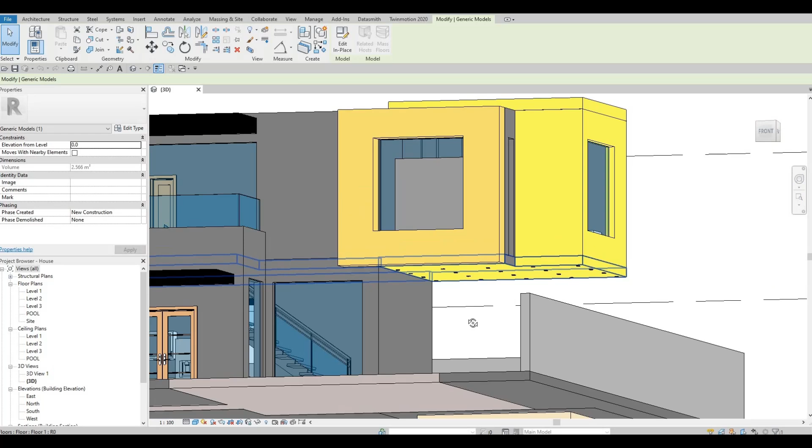So in the last video, we were able to fix everything that we have right here. As you can see, we also added some lights. So now we're going to continue working on this.

What I'm going to do first is fix this. I'm going to extend this, and at the same time, let's go to south elevation. So this is, we extended everything right here, and then we added some lights at the top.

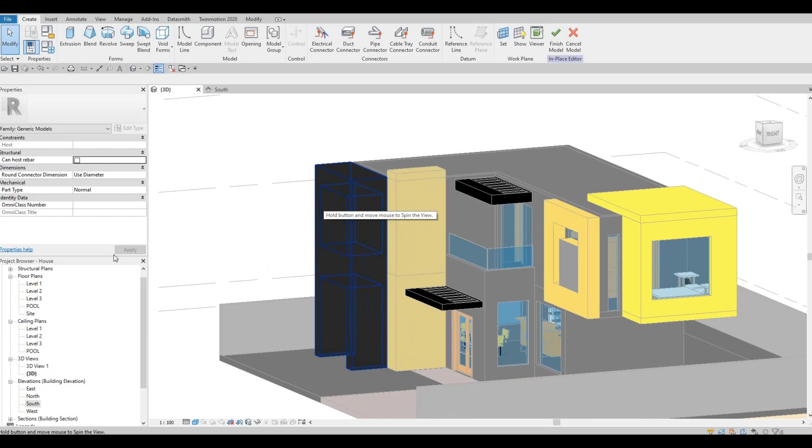Now what I'm going to do is extend a little bit because I want to void some of this, and it will look different afterwards. So what I'm going to do is edit in place, go to maybe east elevation. So now we could see that this is extruded a bit, and now we could do some void extrusion.

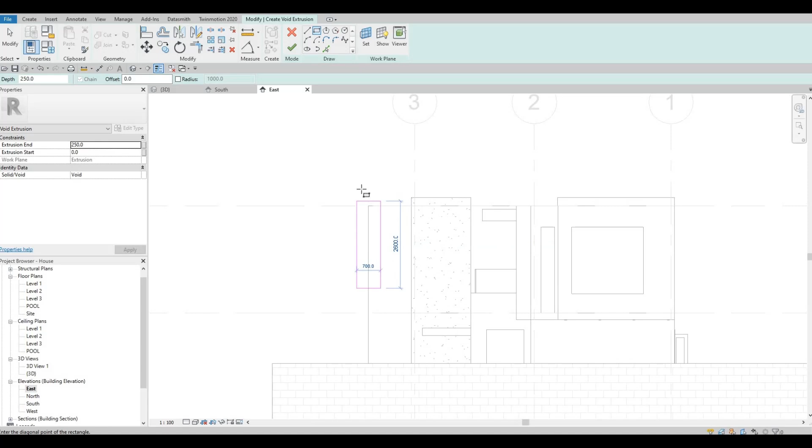Click that, void extrusion, and then we could just pick the plane, and we're going to choose this plane, and then after that we're going to void some of this, and then here I'm going to slant it a bit.

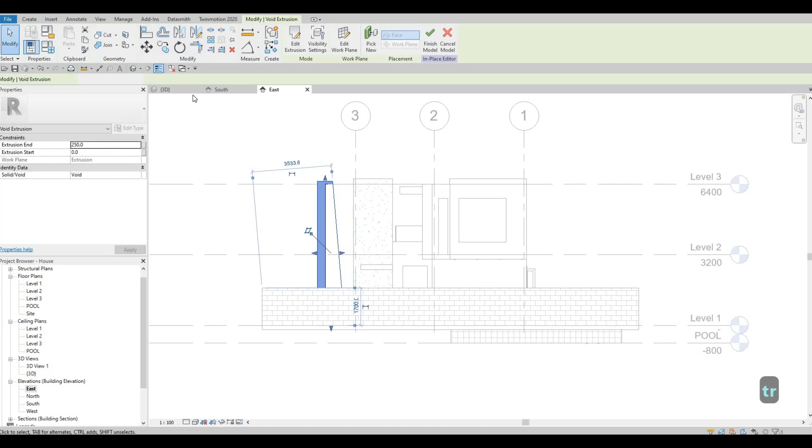And then here I just need to trim and extend and click finish. And before we do anything else, we're going to extend this, going out and going in like that. And then what we need to do next is just cut geometry, and it will cut those ones out.

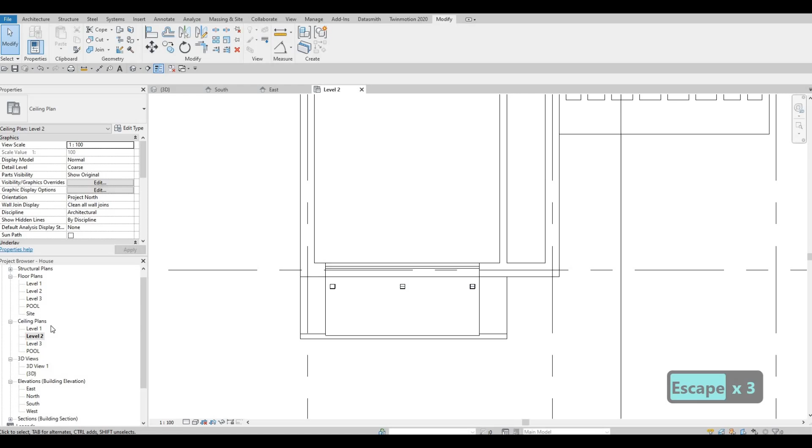All of this, we just need to go to our level 2 again, finish this, and then we just need to align it so that we could align all of this back. And then let's go to our level 1 and then just align this one right here.

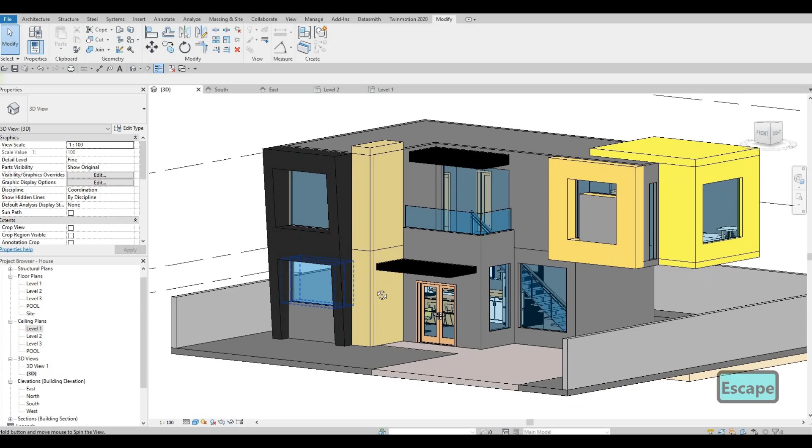We could just move it manually, and let's see if it's there properly, because we did cut a big chunk of this, and as you can see, it looks nicer now. Something different that we could do.

I know it's not visible that it's slanted, so we might end up editing more or adding more of that void extrusion.

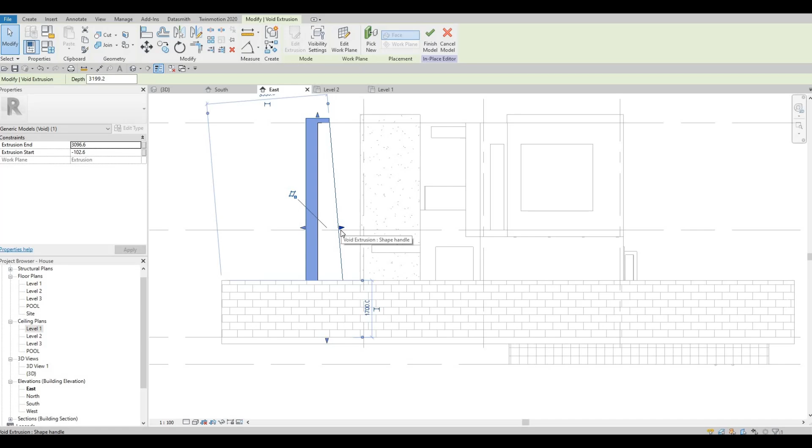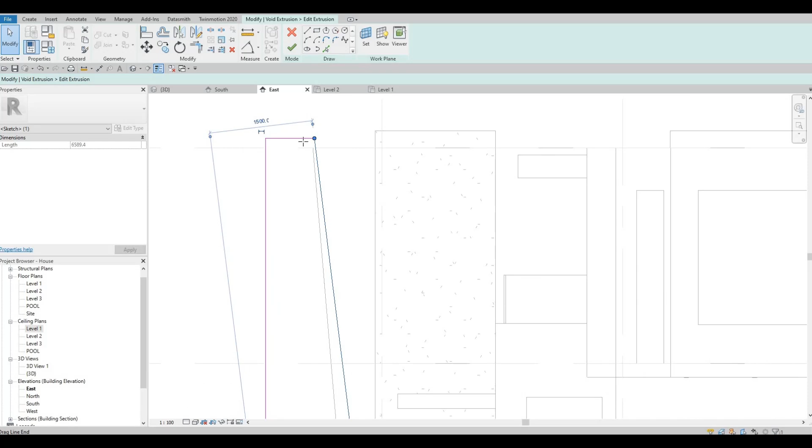I'm going to edit extrusion. Maybe we could increase it more so that it's much more visible. And then trim those, and then click finish, and as you can see, it's much more aggressive.

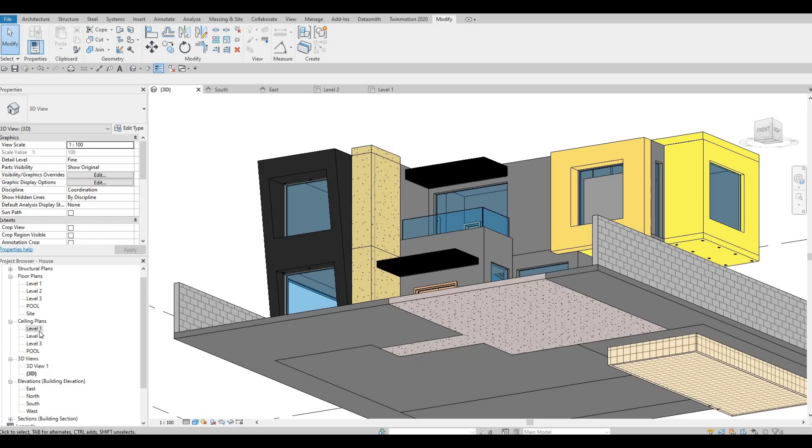What I want to do on the top portion, so let's go to ceiling level 2, is just move this one down a bit so that it's visible like that, and it's equally from the distance right here, so roughly in the middle.

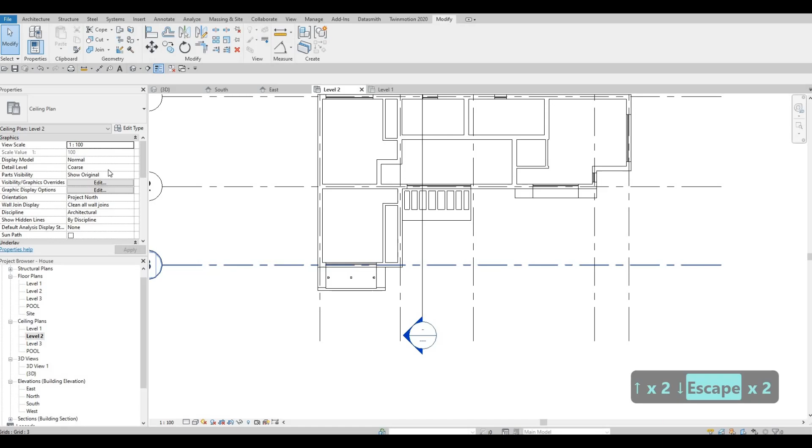So we're just gauging it. Let's go back to 3D and see where we're at. I'm going to make this one small a bit, similar to this thickness. I think that's good enough.

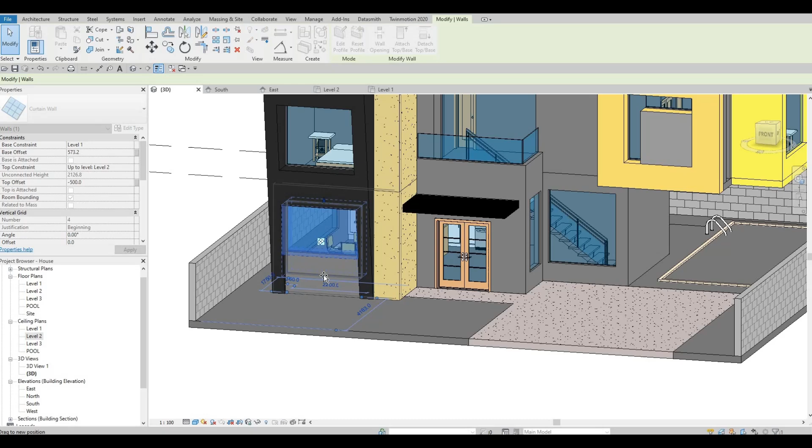What I'm going to do is add some, I'm probably going to increase this. The reason for that is I don't want to add any more of that plant box, so I'm going to align it from this so that everything is aligned.

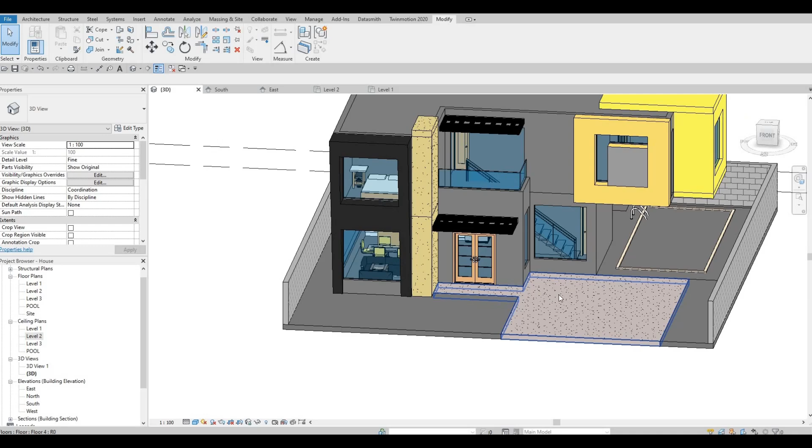Although here I'm going to add some plant box because we have some concrete pad here, and we wanted to add more. So that's what we're going to do now.

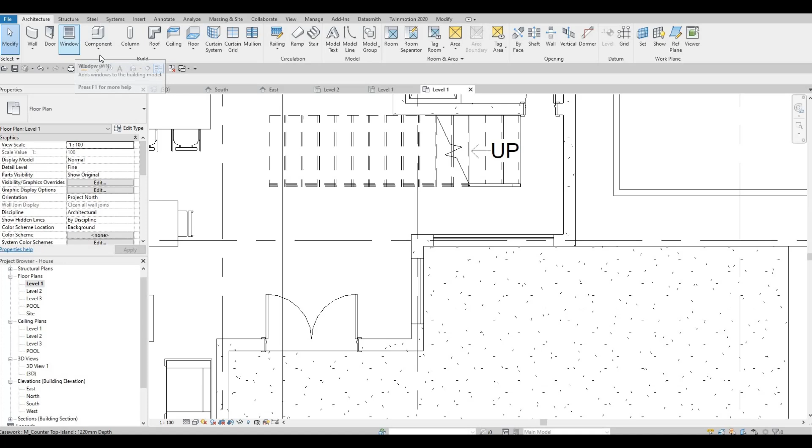Go to level 1, and then we're just going to add a plant box on both. So click on model in place, generic model, press OK, extrusion, and then let's change this to concrete.

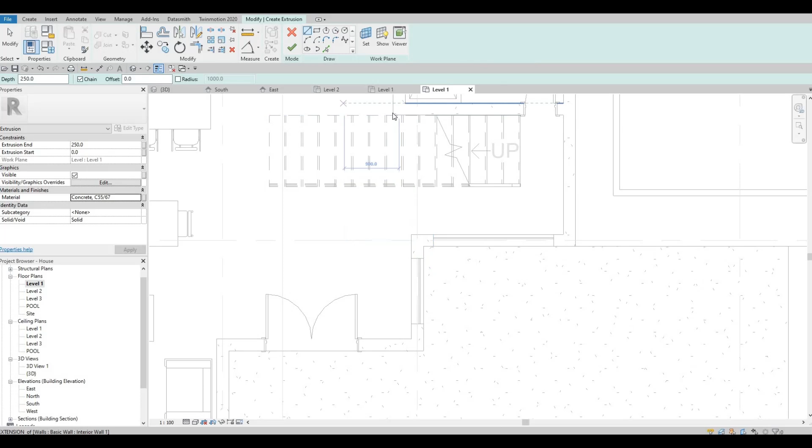Just pull up one of the concrete right there, and then let's just make it an L form. Let's make it 500, and then let's put this one here as well, and then 500 as well.

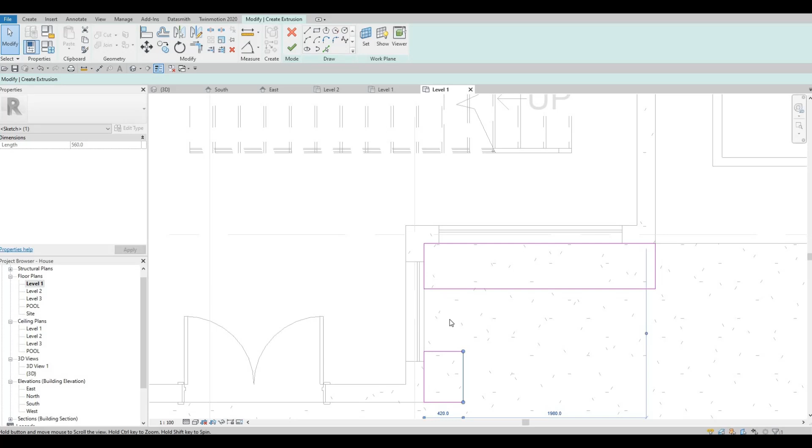Okay, so trim and extend, and then trim and extend right here. Click finish, and it's probably extruded. Something height like this, that's good enough.

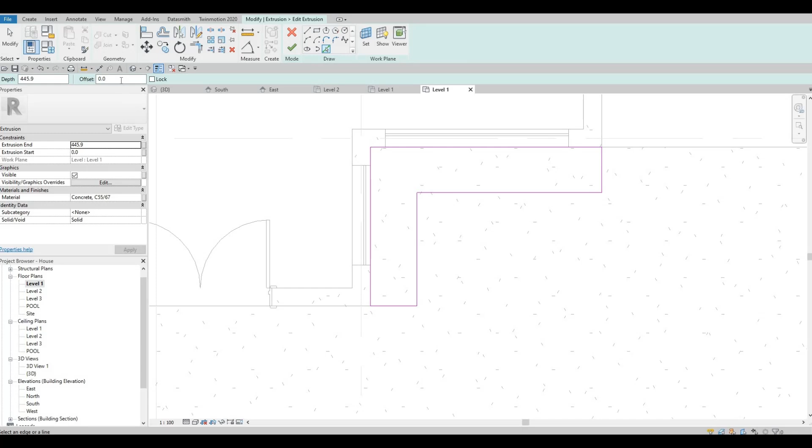And then we're gonna edit that extrusion because we're going to offset pick line, so probably around 100. Let's see the thickness, that's fine for me. And then we just need to trim and extend anything inside there. So that's fine there.

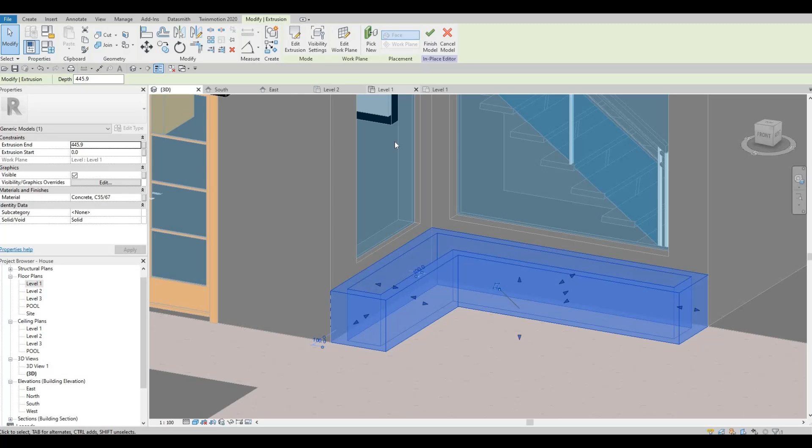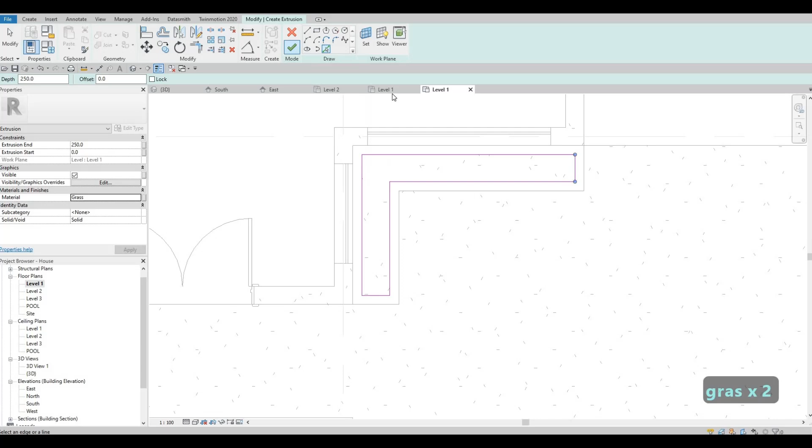We're good, and then we just need to add some grass at the top. So let's go level 1, another extrusion. Pick it so that it's easier. So pick line is right there. And then we just need to put grass, and then click finish, and here we just need to extrude it a bit. There we go, and then click finish.

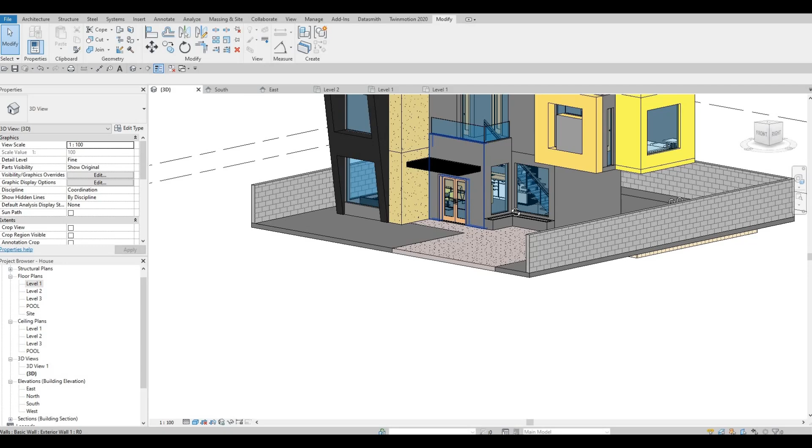So we have our plant box right there, and then we could add in our mullions. But before we add mullions, we need to add curtain grids.

So here I'm going to add curtain grids. Let's put 300 at the top, 300 from the bottom.

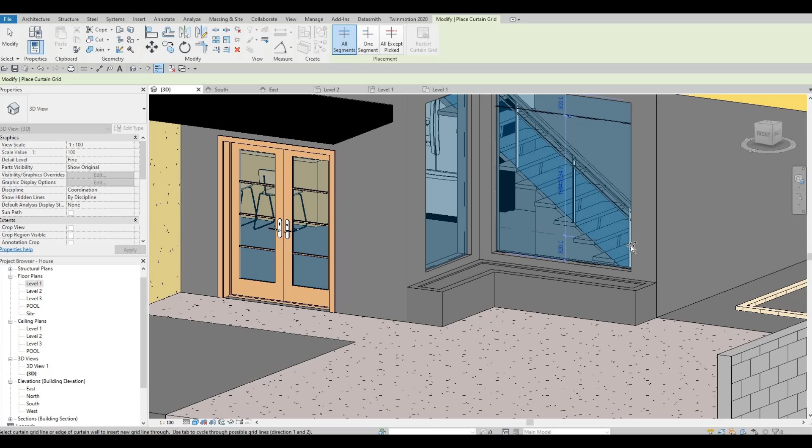So we're going to do that all around, and just add maybe the midpoint or the 3. So I'm going to add it 300 at the top, 300 from the bottom, and then maybe the midpoint of this.

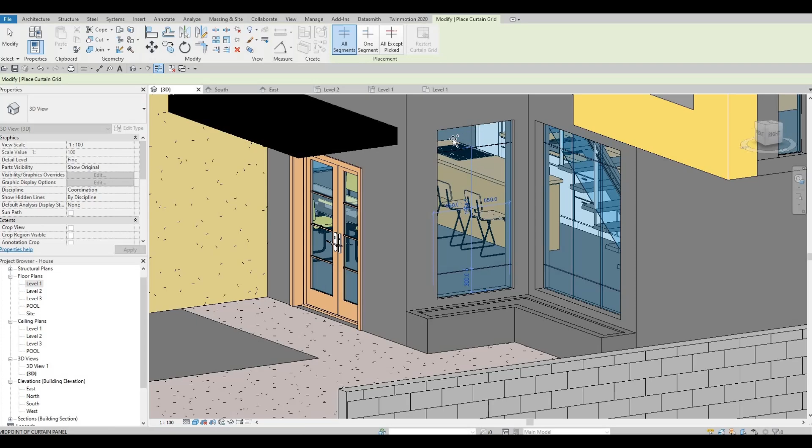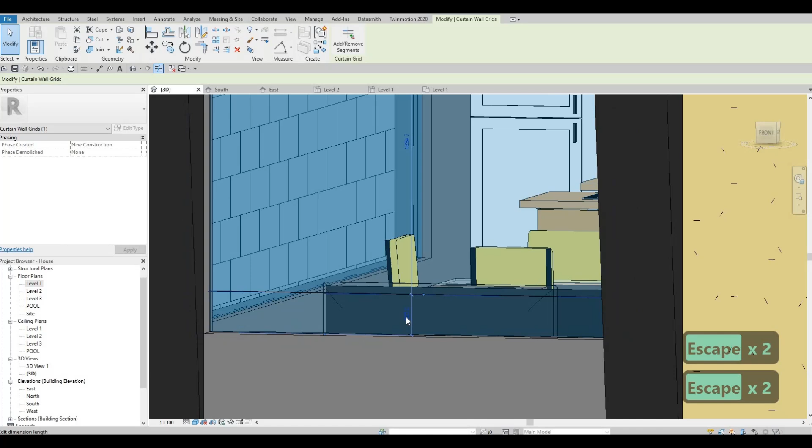So if you made a mistake, you can also—I just don't want to, like for example, this is not exact, I just don't want to escape anymore. That's why I'm trying to do it once. But if you made a mistake, you can always select that, and then you'll be able to get the dimension, and then it will be easier to arrange.

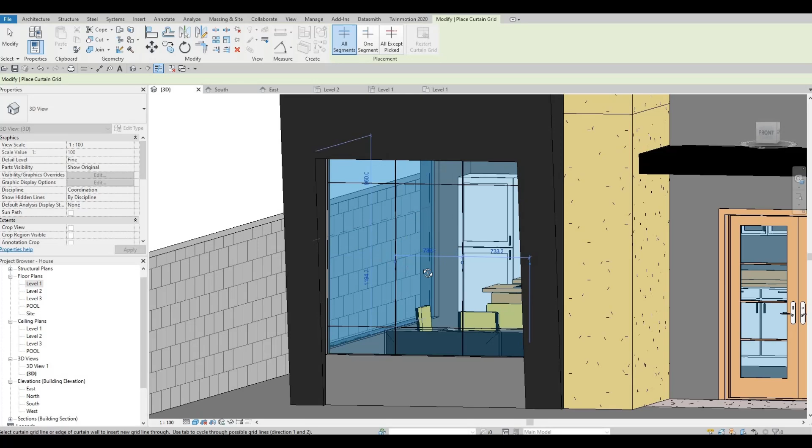So here we could do 3, 700, and then 733. That looks good right there. And then obviously this one is a big one, 300 from the bottom.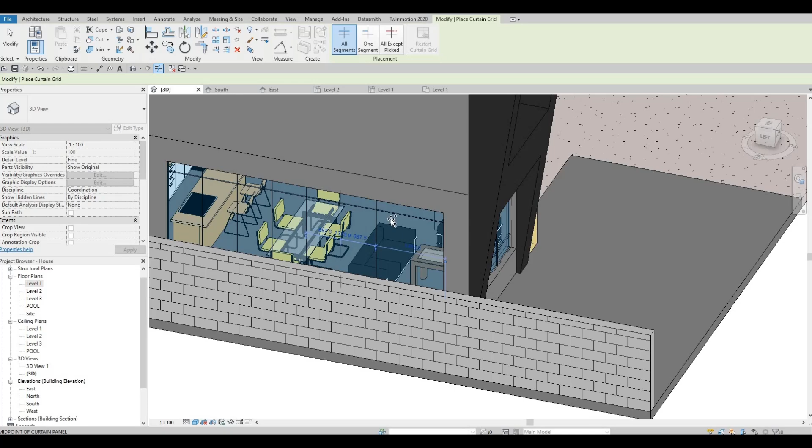And then here we need to get the midpoint, then another midpoint, and then the quarters of those. It will always snap, so it's easy to determine and it will always be equal.

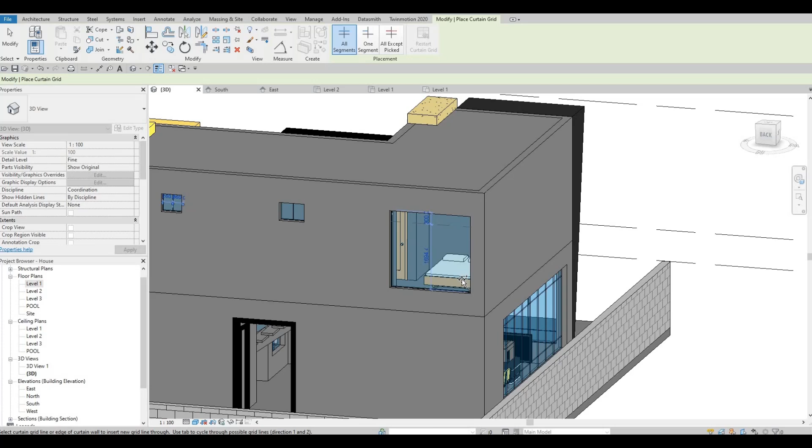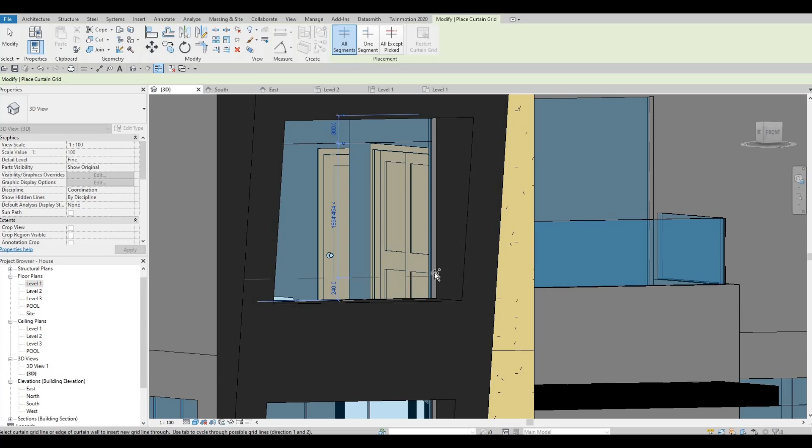So what I'm gonna do here is just the midpoint, and then here 300, and then this one I want 3, and add this one right here, and then 3 as well.

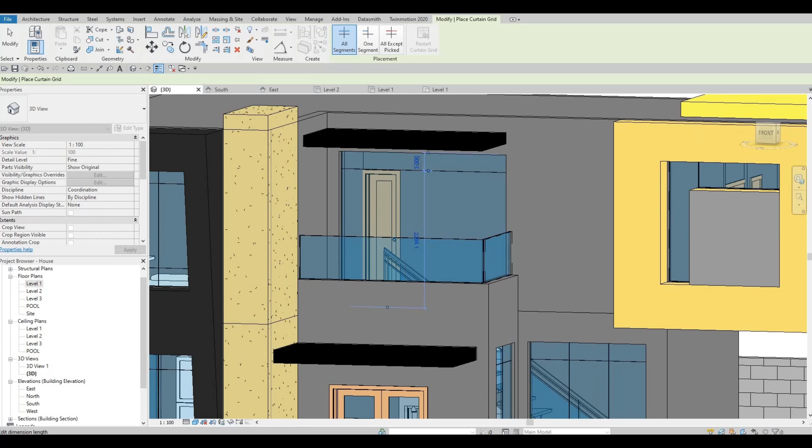There we go. For this one, I'm going to do around 500 at the top. We're gonna make it consistent, or actually make it 500, because we're going to add a different way here, because we're going to add a door.

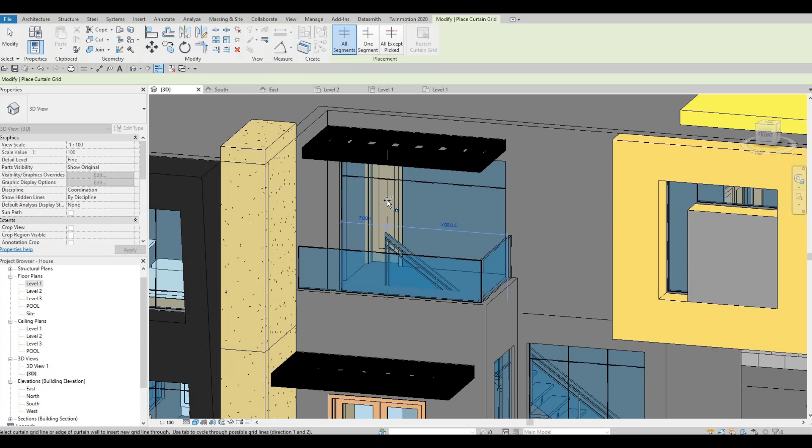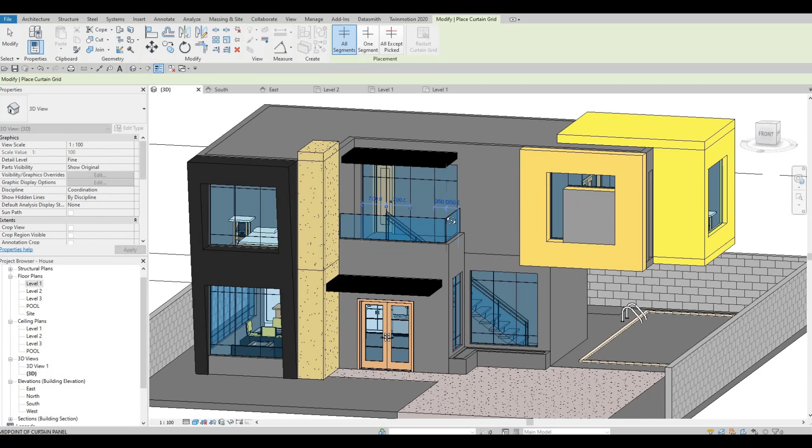So I'm going to check. So this one, yeah, I'm gonna put it midpoint of this, because 700 is good enough. So we have the door there, and then we're going to have a segment below.

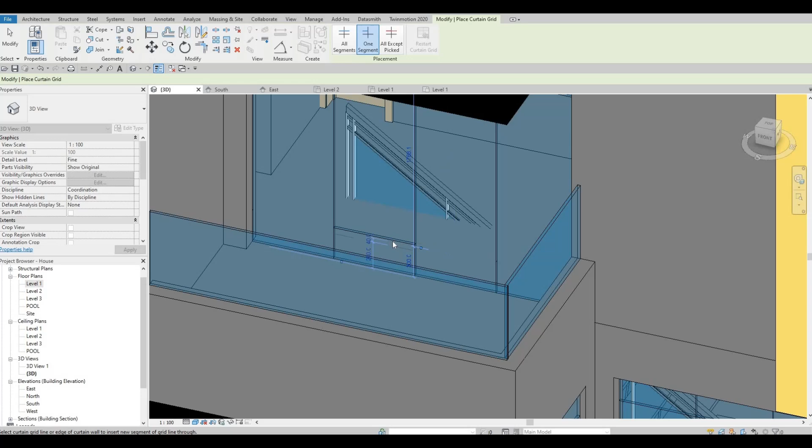Actually, we don't need to add that one. I think this is good enough to have it there. And then for this, we're just going to add—I just like this one right here.

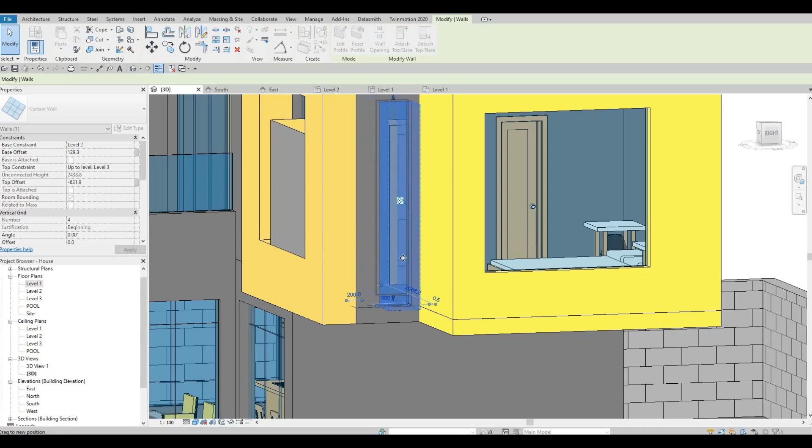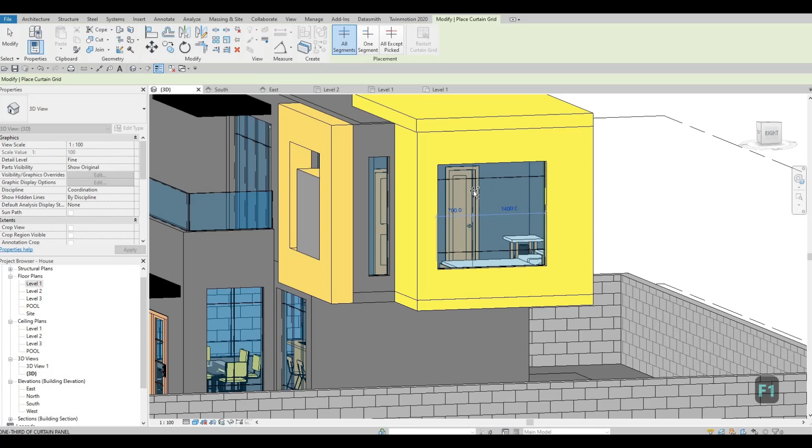Pull it up a little bit. And then here, add the same thing. If you made a mistake, just press escape, and then you can just make 3 of them here.

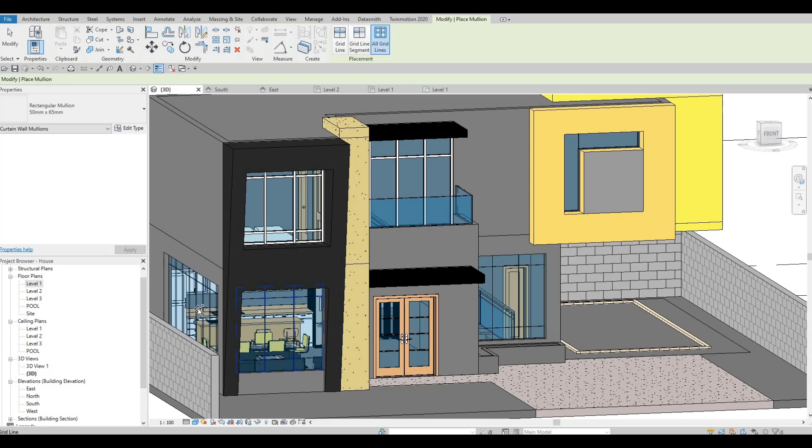It looks like we have everything added. So now we could add our mullion, all grid, and we're going to change this to 50 by 65 rectangular mullion. And then here it's easy because we could just add everything nicely like that. That's how easy it is to add mullions, basically just choosing all grids. Here we need to delete some, or depending on how it looks, we could just change all of those.

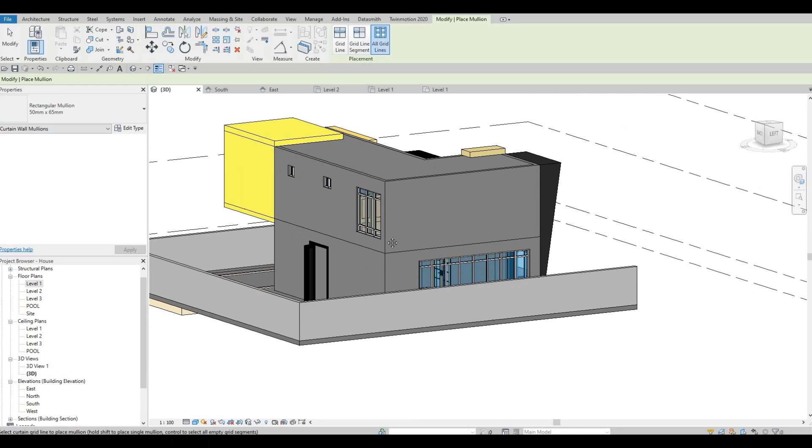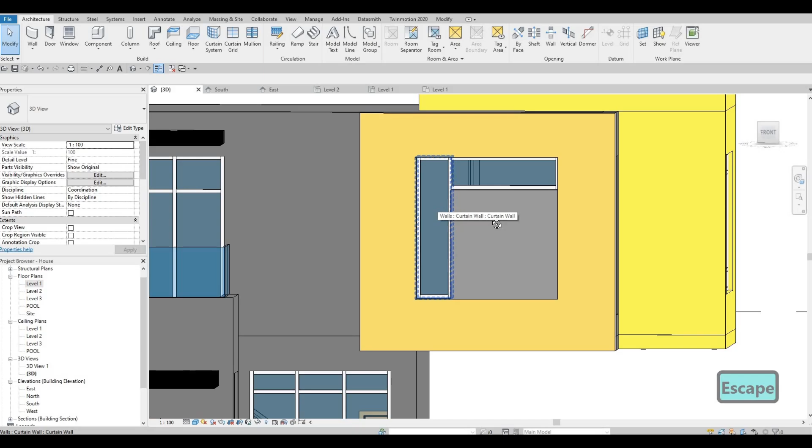So now here first, I think having 2 is too much, so what I'm gonna do is delete 1 so that everything is—or what we could do is delete this, but actually this is good enough the way this one looks. I like this one, so just leave it like that. And then now...

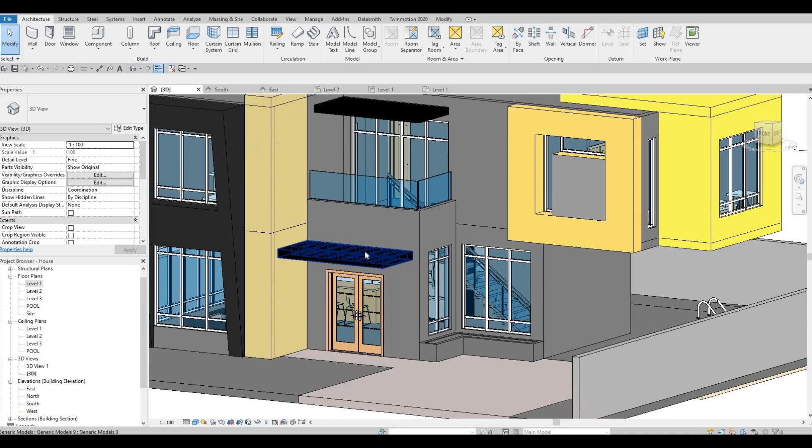Next thing we're going to do is delete this, because we're going to add the door.

So delete this bottom. Now we need to insert, load family, go to doors, and then right here we have curtain wall, single glass door.

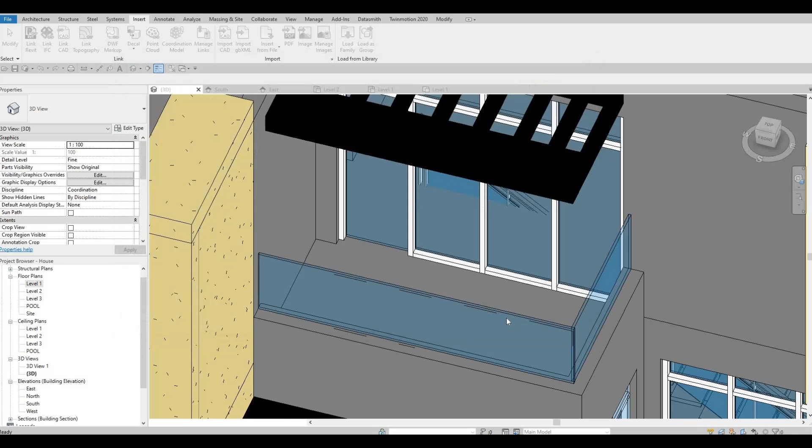Once you insert that, what you need to do next to add it on the curtain wall is click on tab, and once everything is highlighted, you can select that and then choose this.

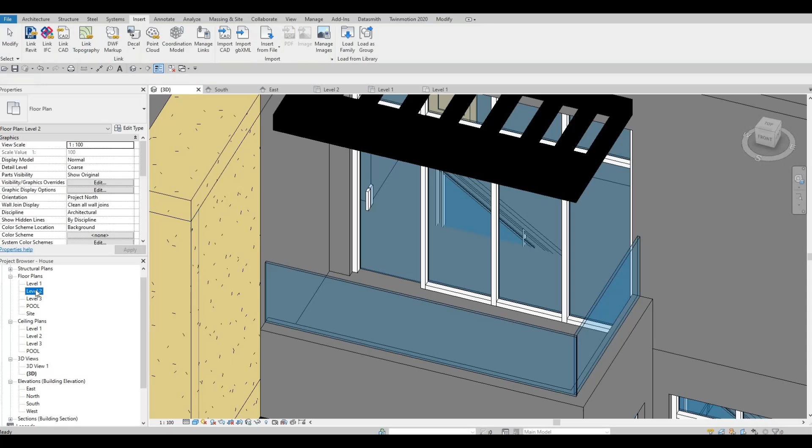Then, in order to change orientation, go to level 2, and now you need to flip it like that. And let's remove the underlay right here, click none, so that everything is clean and showing like that.

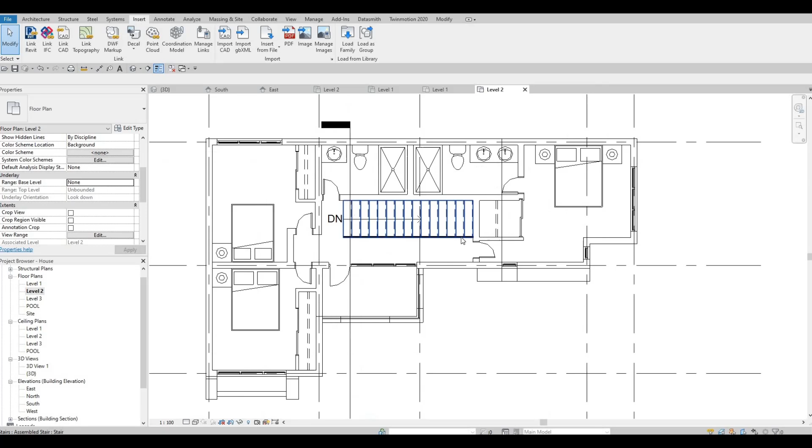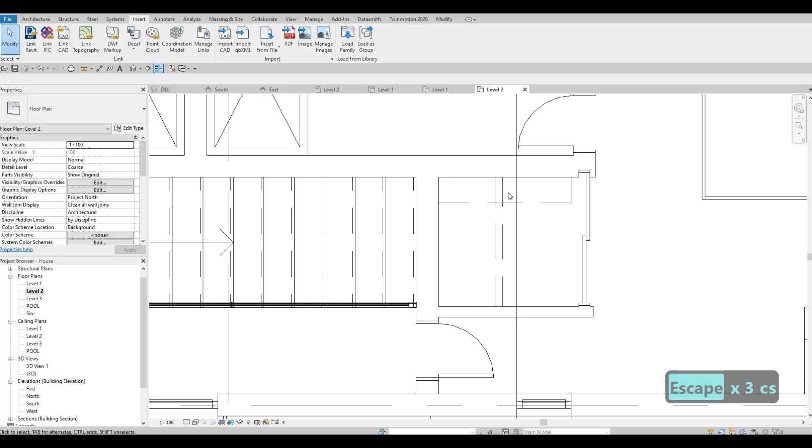What we could do here is we could add in more. What I'm gonna do is like that. There we go. And then we could even have the ones right here. I'm going to mirror this.

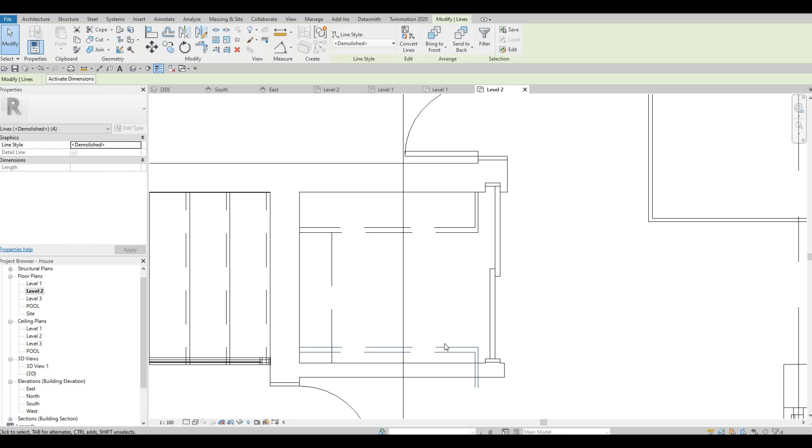Move it, MV to move. And then now we just need to trim all of that. And then CS. Trim.

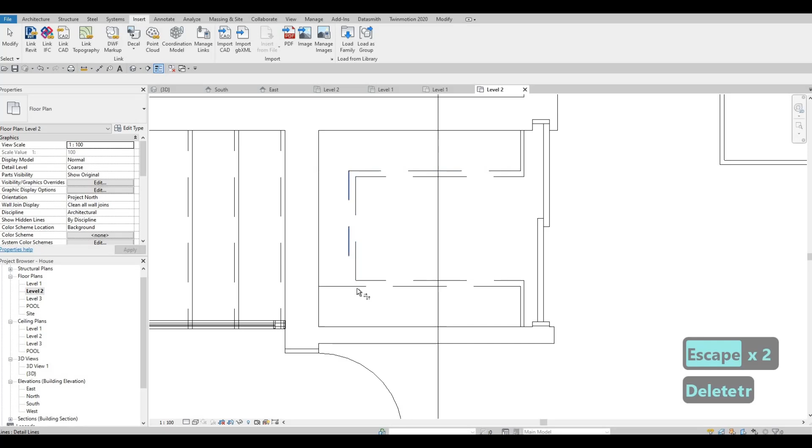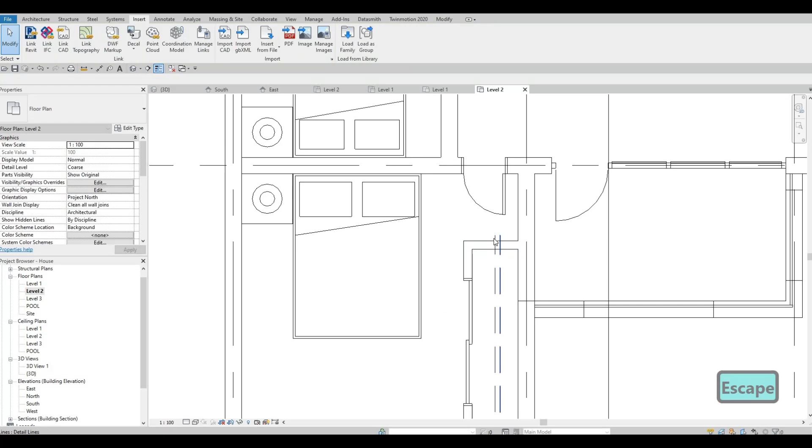So at least we have our walk-in closet right here for our master bedroom. So that's good enough. This one is too much, so we could just move it a little bit so that at least we have this good enough space for the entrance, not too shabby.

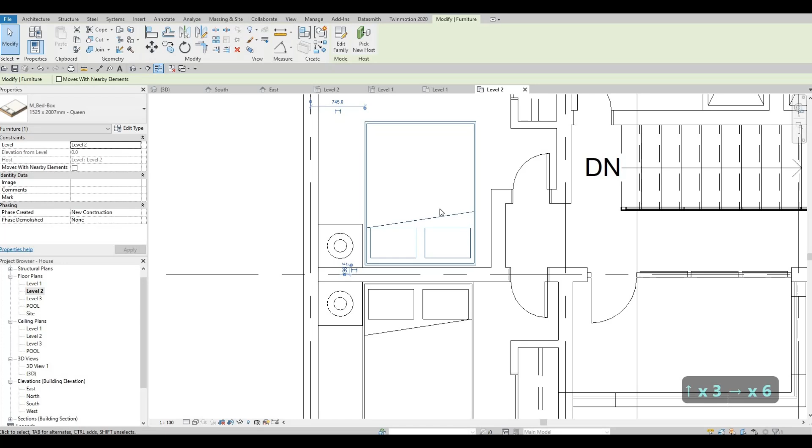This one can even change to a queen size bed, similar to what we have on the bottom, and we could just align it right here, align it right here.

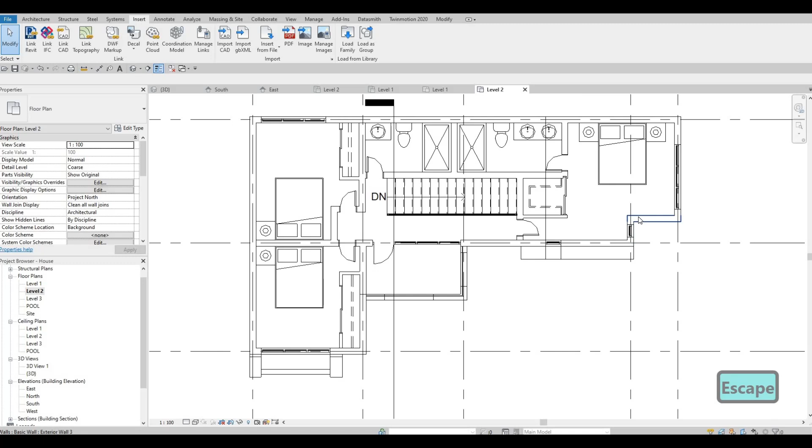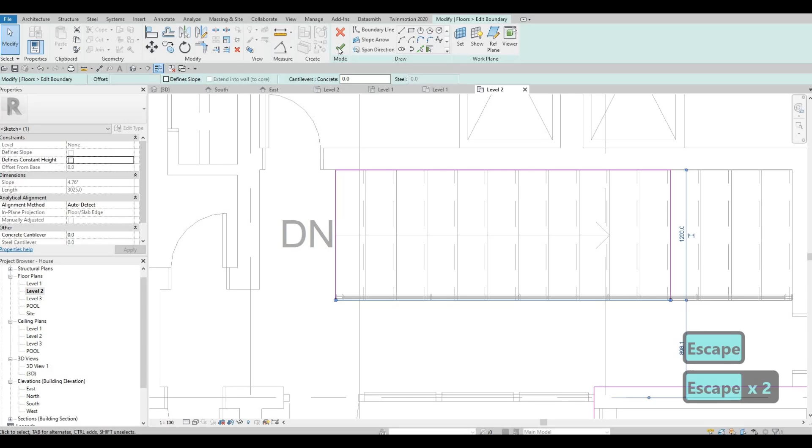And then obviously we need to open up this floor right here. I'm going to select the floor, edit boundary, and we need to open up this part, something right here probably. Click finish. Let's look at it in 3D and see how it looks.

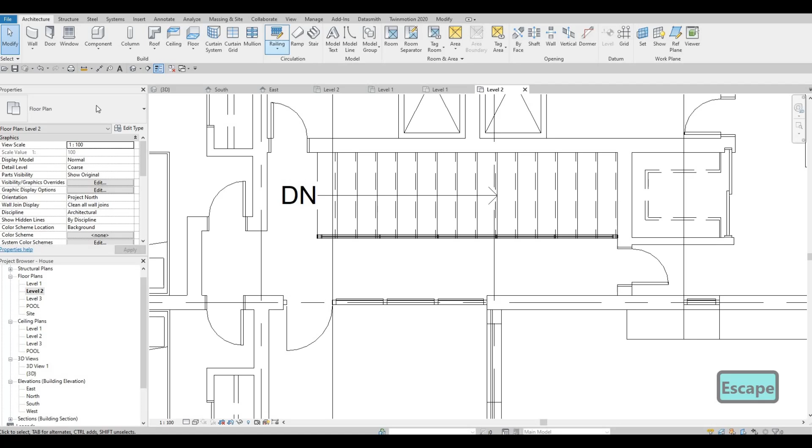And then now we just need to add some railings on this side. So go to architecture, click on railing. We have the rectangular glass bottom fill right here, and we just need to add a line all the way to this line. So once we do, if you can see, everything is secured on those sides.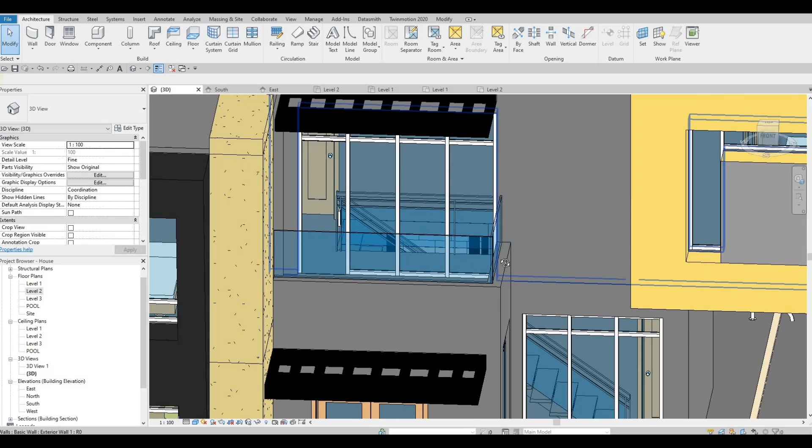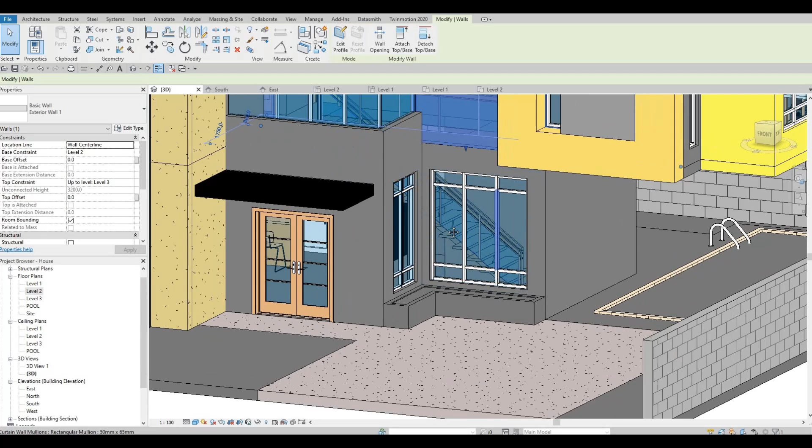There we go. As you can see, everything will be secured onto that wall and to that side. So now when they go up, everything is there. So now the stairs just go up and there, and as you can see, this is an open one with the middle support, and I choose this one with the glass.

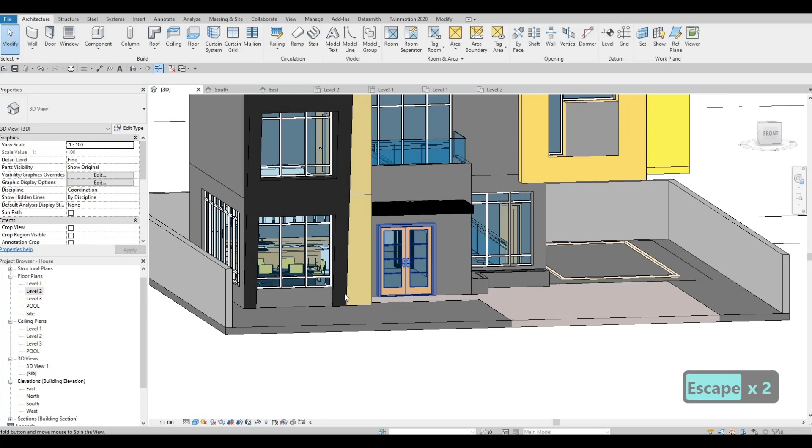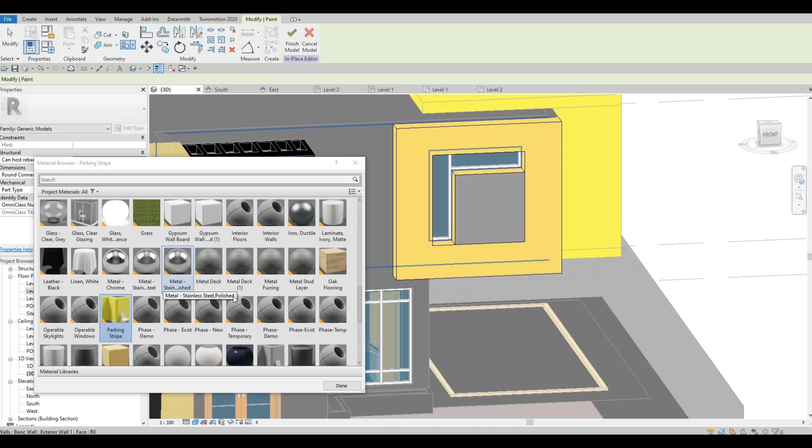And I just want to double check. I want to check which material we have right here, because I want this one to have a wood material as well. So let me check it. I'm going to paint it differently, something different that we haven't used yet.

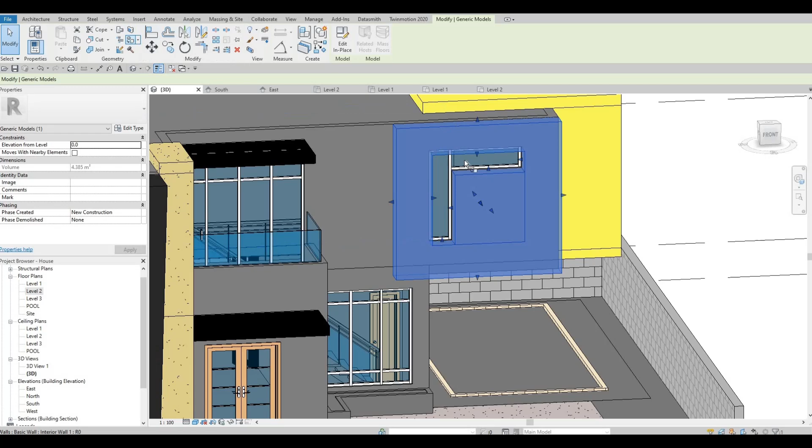So vapor retarder, I know we haven't chosen that, so I'm just going to select that one right there. The reason that we need to edit in place is because if you just go to modify, you won't be able to use paint on this since it's an in-place model. So that's why you need to edit in place first, and then now you have the split face or the paint tools right there. That's the reason why I did that.

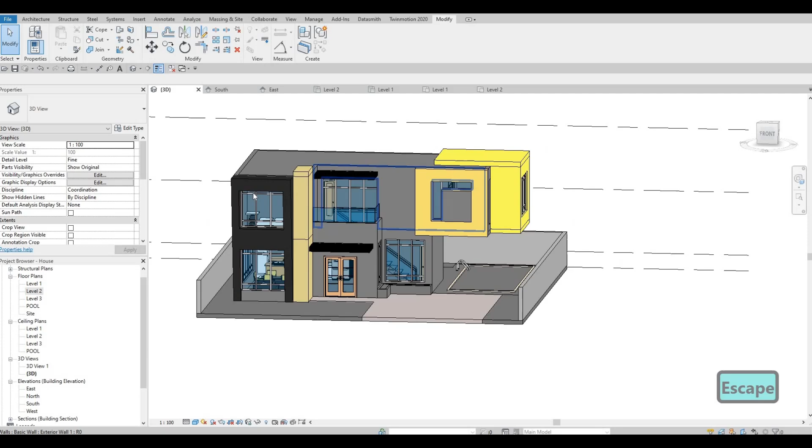Basically all of this will be white, this will be wood, a different kind. This will probably be the panel, metal panel, and then anything else will be changed.

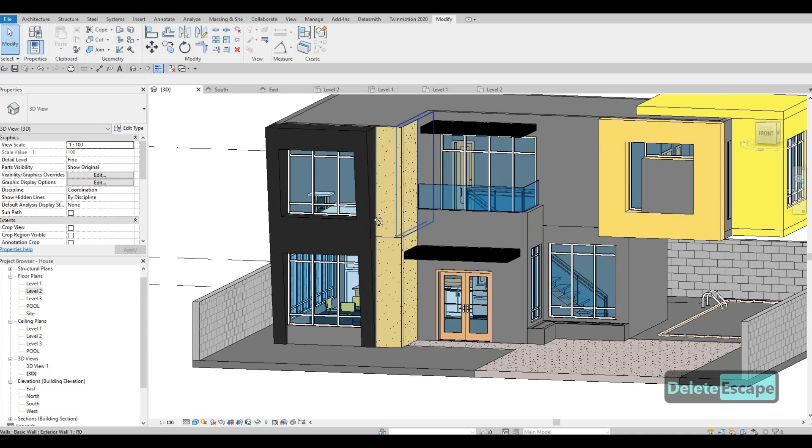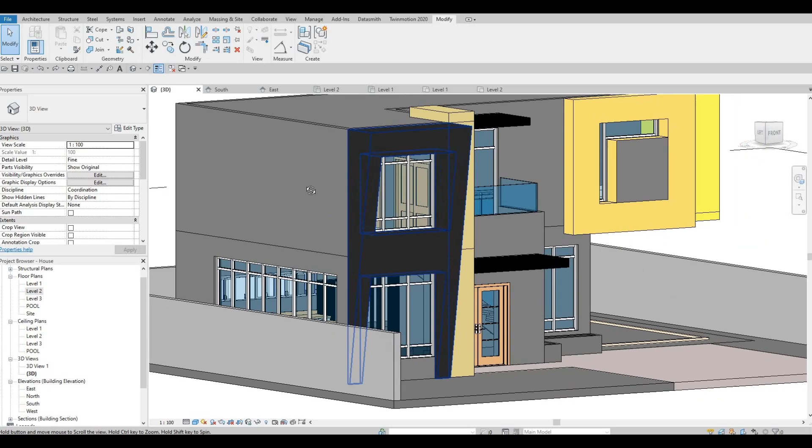Here we could remove that and just change this wall right here to be different. Actually, just pull it back, undo that, and then yeah, I think that's good enough for that part. And then at least we have this something different right here. It's subtle, but it's actually gonna give more character to this building, or this house model that we created.

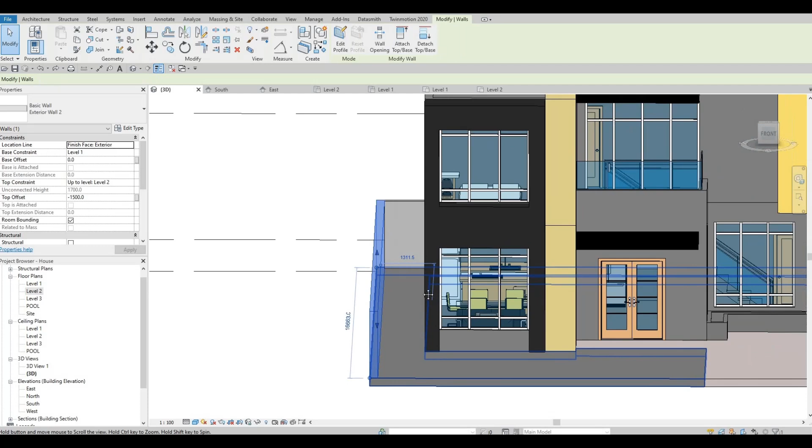And then all of this will be grassed. I'm thinking of, yeah, I'll just put some grass parts right here. This is exterior wall, and then I'm hoping probably in the next video we're gonna fix some of the kitchen, because I want to have the casing for the fridge.

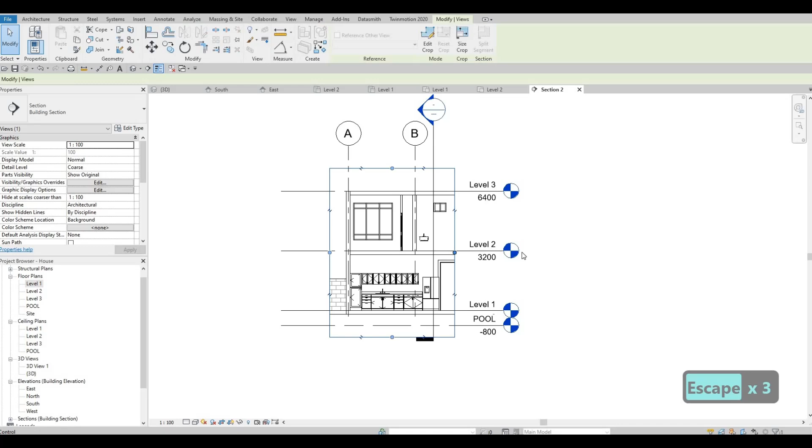So here nothing is there, nothing at the back, so I would just like to add those backsplash, and then maybe the casing right here.